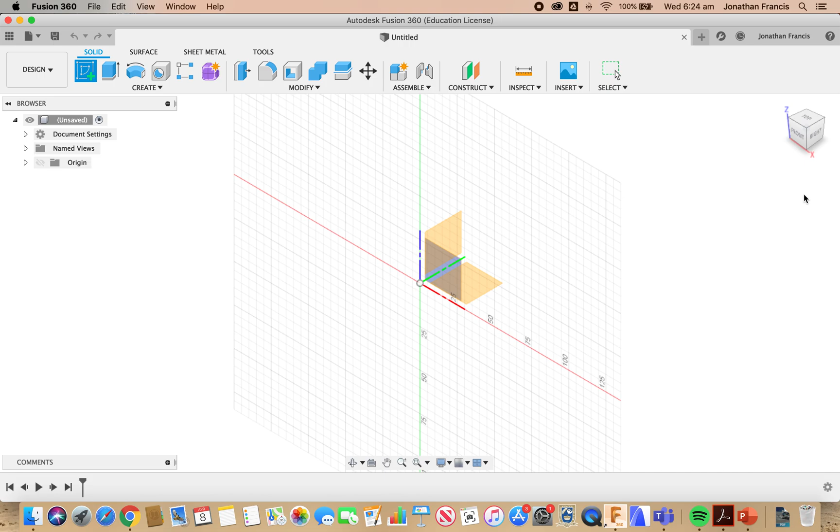Today we're going to look to begin modelling our mantle clock. To start, you're going to click Create Sketch. We're going to come over to our navigation box, select Top, and then select the plane.

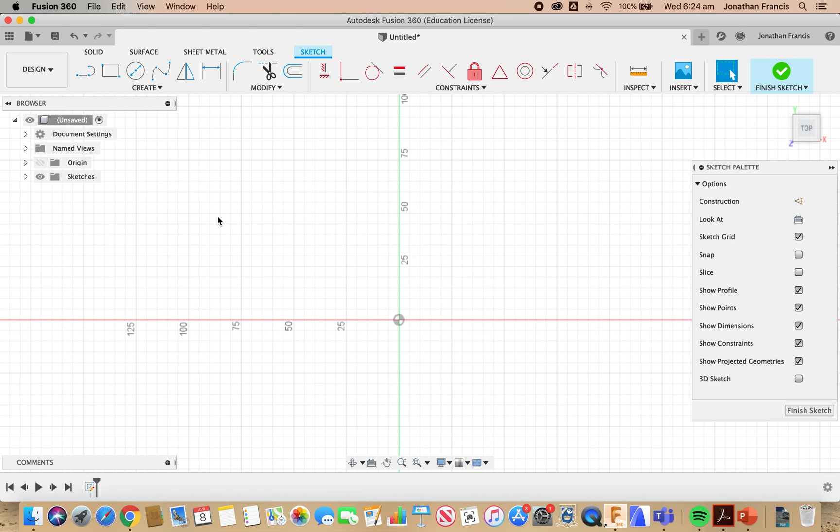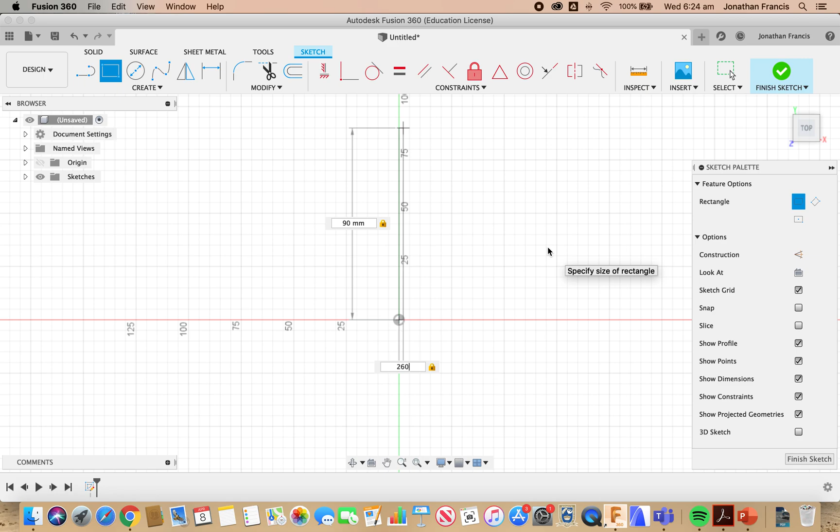To begin drawing, first off we need a rectangle, so we're going to come up here to a 2-point rectangle, or use the shortcut key R for rectangle, starting in the centre and drawing out. We don't have to try and get these measurements spot on, we can actually type in our measurements. That's what I'm going to do now: 90, using the tab key to toggle between the two dimensions, and my second dimension is 260. Then we can click Enter.

Select Finish Sketch, and then fit it to the window. Now we can also zoom a little bit in and out, make that easier to see.

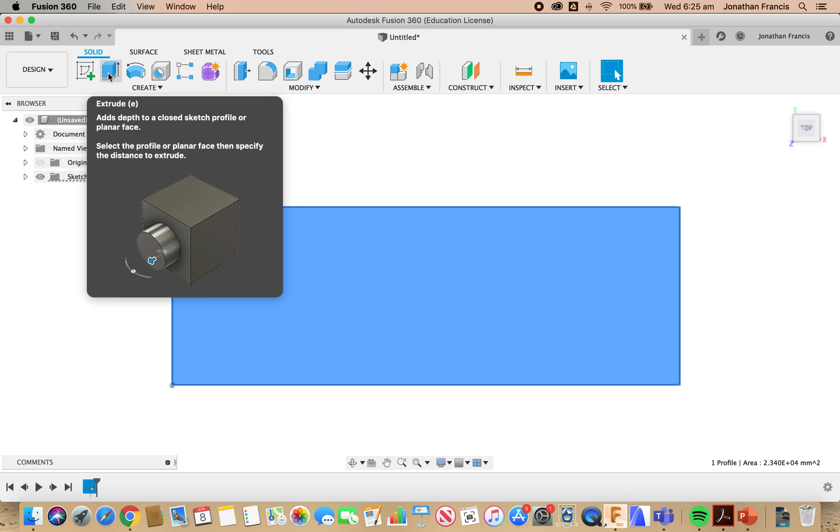We want to select that surface and extrude it, make it 3D. So to start with, we can use the extrude button on the top left up here, or shortcut key E. I'm going to go with E. I'm going to hold Shift and toggle that around just a little bit, or you can select to view from the edge between the top and the front.

I'm going to lift that up. We want that thickness to be 19. Now in our extrude dialog box, for this shape, for the base piece, is very simple. We have a distance of 19. We want a 0-degree taper.

The operation we want, though, is not a new body, it's a new component. So we're going to go down to New Component, click OK, and the component will then come up in our menu on the left hand side. So I'm going to double click on that, rename it Base. Notice I'm using all caps. And we're going to leave that now.

Now before I go on, I'm going to hit Save. I'm going to call this mantle clock, again all caps. Our location, Year 10 ITS, classwork, and I'm going to hit Save.

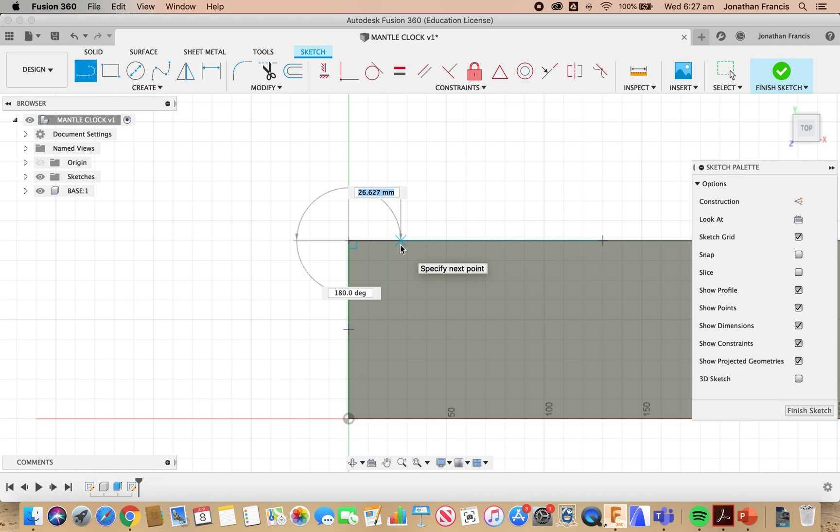So I'm going to select line, draw a line there, type in 19, enter, followed then by rectangle, or shortcut key R, and we want this to be 40 millimeters down, and then again tab to toggle between the dimensions, 19 wide, and enter. Now when we cut this, it's not going to be a rectangle because we use the router. So we're actually going to come up and we're going to draw a circle as well at the end.

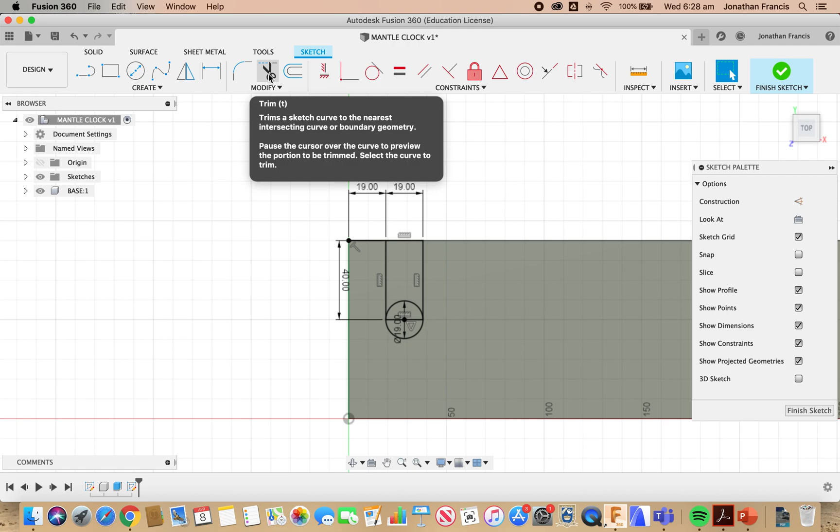So we want to find the middle point, which Fusion gives us with the X. Select the middle point and we're going to type in 19 as our diameter and hit enter. Last but not least, we can trim, so either the scissors or T for trim the unnecessary lines. We don't need the back half of our circle, and we don't need this line from our rectangle either. So our whole shape now is a rectangle with a rounded end.

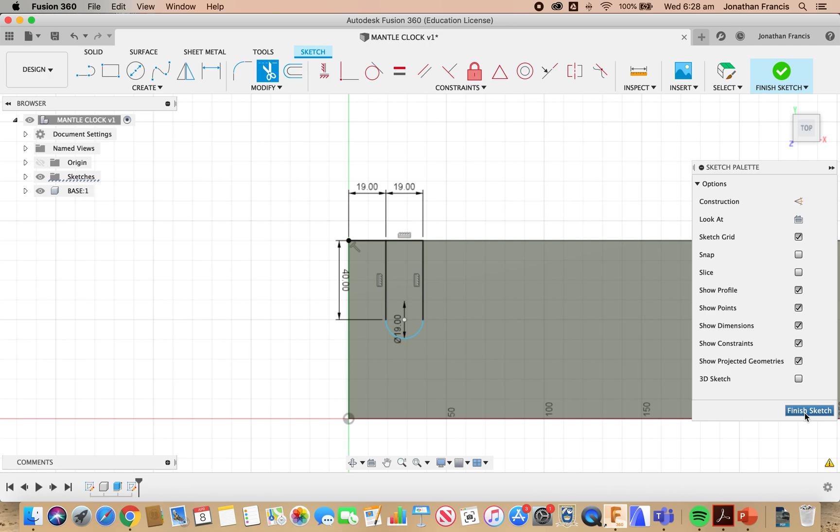Ignore the warning, that won't matter at all. Now before we finish the sketch, we're going to draw the second part on the left hand side over here. So back to the line tool, the line from our corner, 19 in, and this is very much the same as the other side, only in the opposite direction.

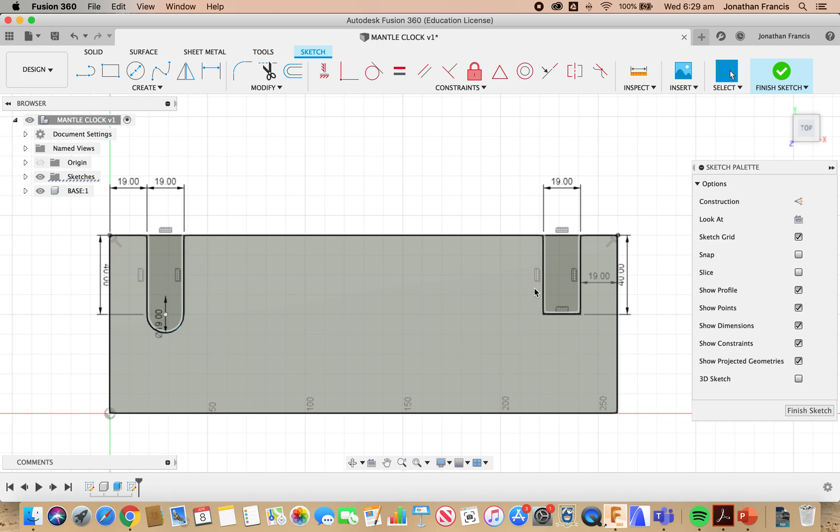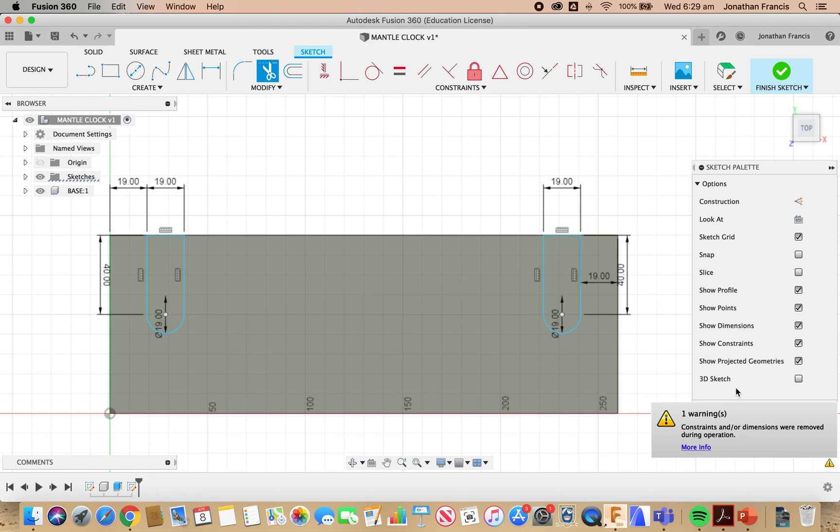So 40, 19, using tab to toggle between the two dimensions, and enter. Then the circle tool, or C for circle, obtain the middle, drag that one out, 19, enter, T for trim, and get rid of the pieces that we don't need. Now we could also trim off the lines that we put in here to begin with, but we don't have to. Okay, we now want to finish the sketch, so we come over, finish sketch.

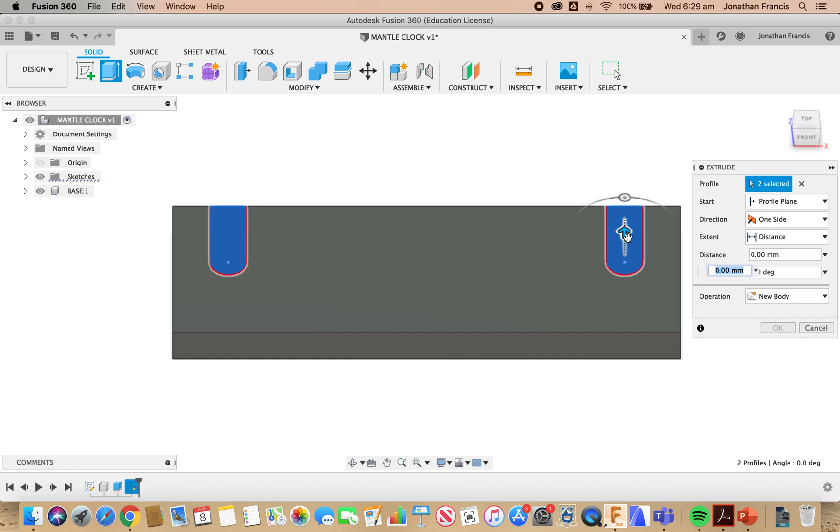And we can now extrude these. So if I select the first shape there, hold shift, and select the second shape, I want to extrude this down, so I'm going to press E for extrude. Now that arrow points up, which is fine. I can actually grab that arrow and drag it down as well, and you can see it's jumped straight to 10. Okay, the 10mm distance is indicated here, and very faintly under the arrow there.

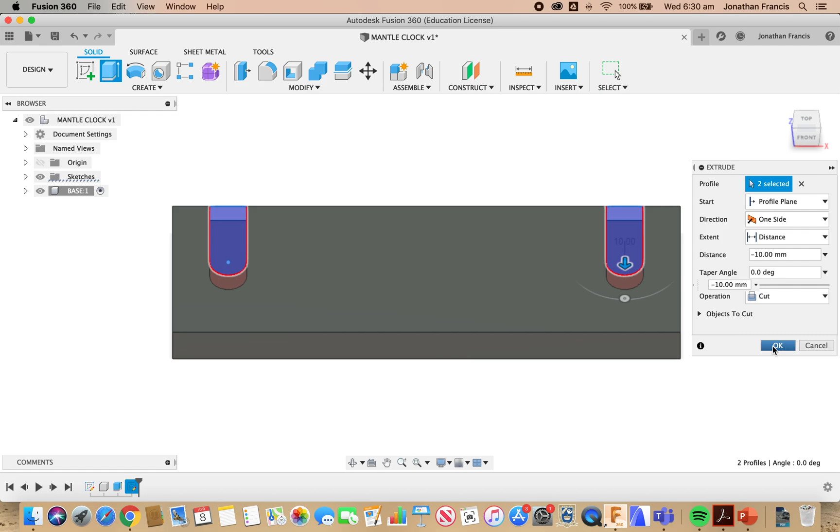I want to cut it out. The object that I'm cutting is my base, which is fine. We're going to click OK. We now have our housings. The base piece is now almost complete. So again, I'm going to go and hit save. And OK.

Lastly, on our base piece, we want to select the edge. I'm going to hold shift so I can select multiples. I want to come up to modify. In modify, I want to chamfer the edge.

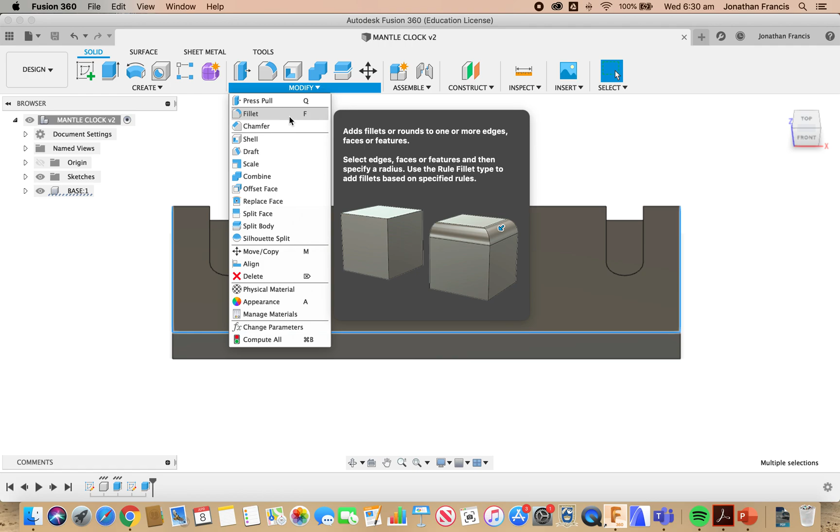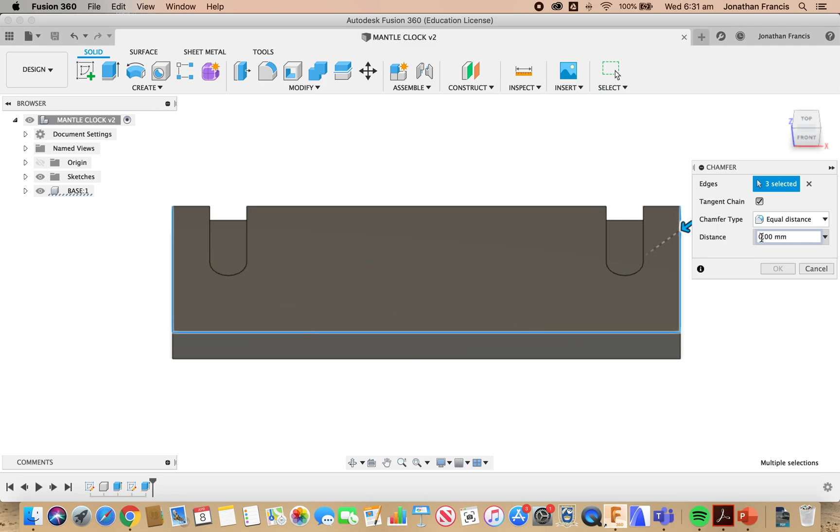In my chamfer dialog box, I can do it equal distances, I can do it 2 distances, or a distance and an angle. I want equal distances, because as you can see from your plans, we're doing that by 5mm each way. So we're going to type in 5, you can see the preview there, looks good, and we click OK. Last time, save, and our base piece is finished.